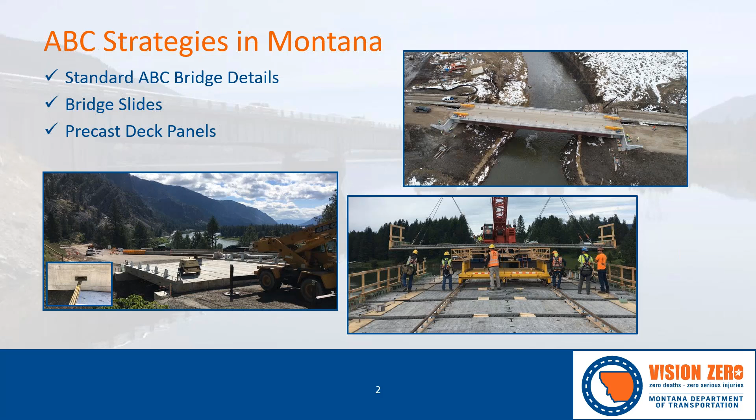When we think about ABC solutions, we might not always think about using it for bridge rehabilitation, but rehabilitation of bridges can have the same challenges as replacements, primarily related to construction duration and maintenance of traffic. Construction of the deck is often one of the longest duration activities on a schedule, so utilizing precast deck elements can reduce the overall project time significantly. We're going to discuss how we use precast deck elements on our featured bridge rehabilitation project today.

Montana is a geographically large state with a small population and a proportionally small budget for the maintenance, preservation, and capital improvements of nearly 5,000 bridges across the state. Our featured project is located in the mountainous northwest corner of Montana, where there are fairly high levels of precipitation and freezing temperatures for several months each year. The bridge spans the Clark Fork River at the head of the Noxon Reservoir near the small community of Trout Creek. The bridge carries Montana 200, which is an east-west state primary route. It's on the National Freight Network, and it's used for multi-state travel and shipping. It's also regionally important to the community for school bus routes and other public services.

So the essential purpose of the project was to rehabilitate the bridge. Rehabilitation was chosen to improve the overall bridge condition, particularly the deck, which was in poor condition, and to extend the serviceable life of the bridge. The deck had significant delamination throughout the entire surface and high chloride concentration, which had penetrated deep into the slab due to the frequent application of anti-icing chemicals. Because much of the structural section of the deck would need to be removed in order to eliminate the chlorides and prevent further corrosion, a deck replacement was chosen rather than a surface treatment like a partial depth mill and overlay. Complete replacement of the entire structure was not financially feasible for MDT, and we believe we could get several decades more functional life from the structure with a new deck and a rehabilitated superstructure.

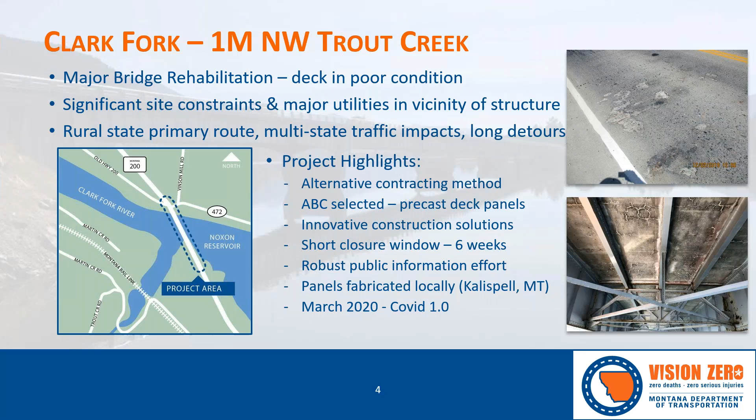The contractor received the notice to proceed and began mobilizing to the site early in 2020, when COVID started shutting things down in March. I believe the partnership developed with the alternative contracting and the use of ABC methods allowed us to press on with the project, mitigate risks and delays, and keep the project running safely.

I wanted to touch briefly on the alternative contracting method we used and what it meant to the project. MDT had just been granted approval by the state legislature to utilize this contracting method we call Construction Manager General Contractor, or CMGC, which allows us to bring a contractor, the construction manager, on board during the pre-construction phase.

And we thought this project presented an excellent opportunity to test the contracting method on a problem that could really benefit from early contractor involvement.

The project CMGC team consisted of MDT, the owner, HDR, the engineer, and Kiewit, the contractor, forming what we called the three-legged stool, each leg having an equal role that supported this project throughout pre-construction and construction phases. Kiewit was ultimately awarded the construction contract, thus becoming the general contractor.

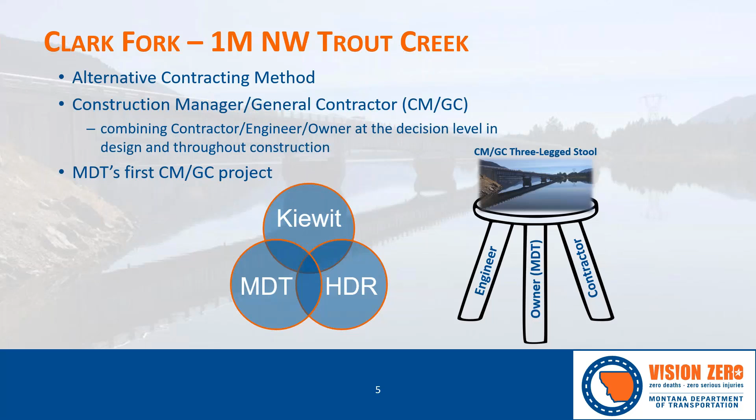So the pre-construction timeline for the project lasted just 9 months from project kickoff to contract award. Why so short? Well, funding for the project was available in fiscal year 2020, but it took some time to receive approval to use the new CMGC contracting method and get it through the RFP process for team selection.

And we wanted to let the contract in December so the contractor would have time to order and begin deck panel fabrication, which was a critical path construction element. And we wanted to get the bridge rehab work done before more deterioration occurred.

So that left us with a very narrow window of opportunity, but the team decided to take on that challenge and managed to meet this very tight timeline.

So the majority of construction occurred in the summer of 2020, with full closure beginning in June and lasting just 6 weeks, where most of the deck replacement work happened. That closure window was selected based on stakeholder and community input to avoid important events on the timeline. Traditional cast-in-place deck replacement would have taken at least twice that long, pushing the construction closure into September.

Other construction activities did take place before and after that closure window, with minimal impact to traffic.

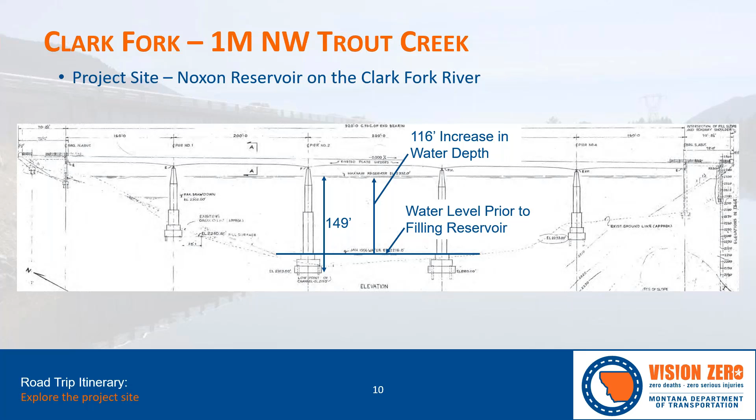Looking at the bridge in the as-built, we see that back when the original bridge builders were here, the reservoir was much lower. In fact, it was at this line. From the new water level to the bottom of that footing is 149 feet, and when they raised that reservoir, it raised 116 feet. This makes the bridge replacement and bridge detours much more costly in the current state of the reservoir.

Bringing us back to the bridge itself, the project team was originally planning to facilitate traffic on the bridge during construction. There are many cases where bridge decks can be replaced while simultaneously maintaining traffic, but the Trout Creek Bridge was very narrow and made up of a 2-girder riveted system that would only allow one lane at a time with traffic, making that construction unsafe. Based on a detailed structural analysis, the project team determined that the bridge may not adequately support highway traffic during deck replacement work.

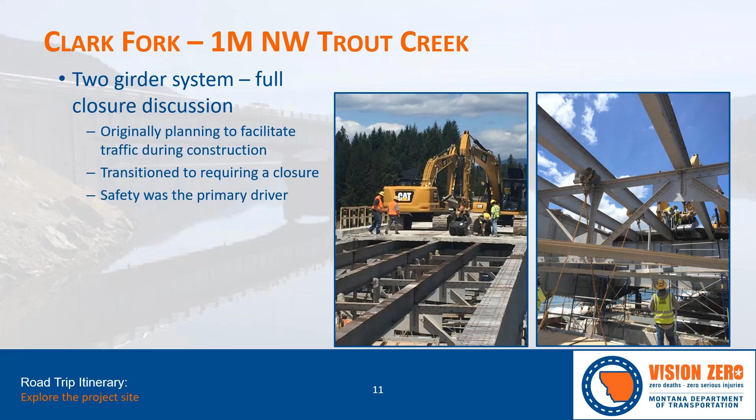Therefore, the team transitioned to requiring a full closure of the highway to complete the work. Again, safety was the primary driver of this decision, but also things like differential deflections of the bridge system due to live load traffic during construction were a concern for joint cures and the overall quality we wanted at the end of the project.

Stepping back a little bit, I wanted to talk about some of the main features at the project site. I wanted to take advantage of some fantastic footage we have to provide a better overview of the site and some of the work we'll be discussing today. This is in our itinerary, that detour down memory lane, but it's also kind of a project summary, so keep that in mind.

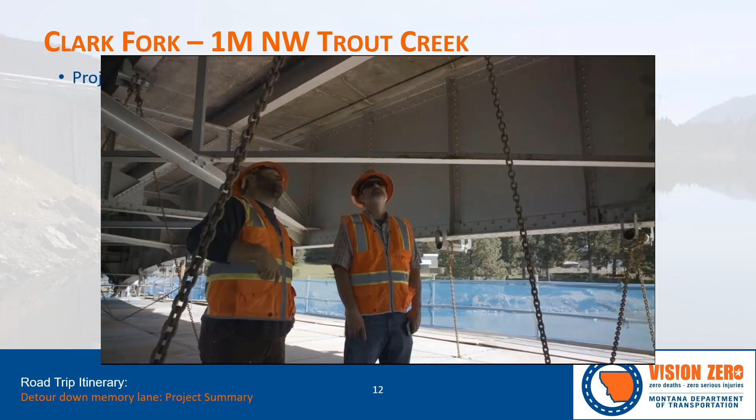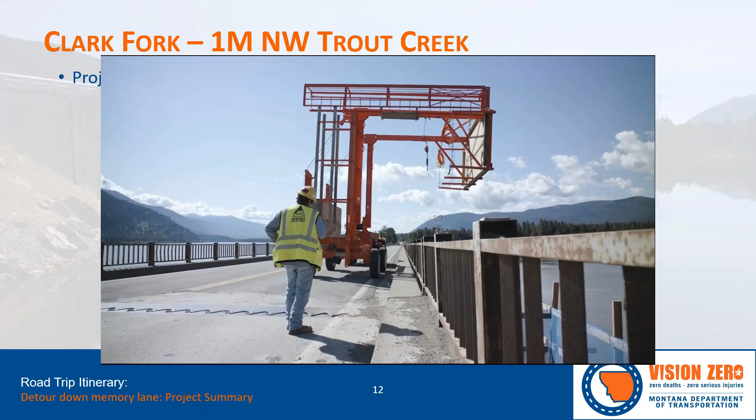We start out with a view of the Clark Fork River Bridge near Trout Creek, as we've seen before. Even though the bridge was around 60 years old, it had been well maintained and proved worthy of rehabilitation. Due to the site constraints previously discussed, including the extreme depth of the intersecting waterway, construction of a temporary bridge, either traditional or floating, was determined to be impractical and very costly. While the project cost was approximately $10.5 million, it was estimated that a replacement structure would cost nearly 2 to 3 times that amount.

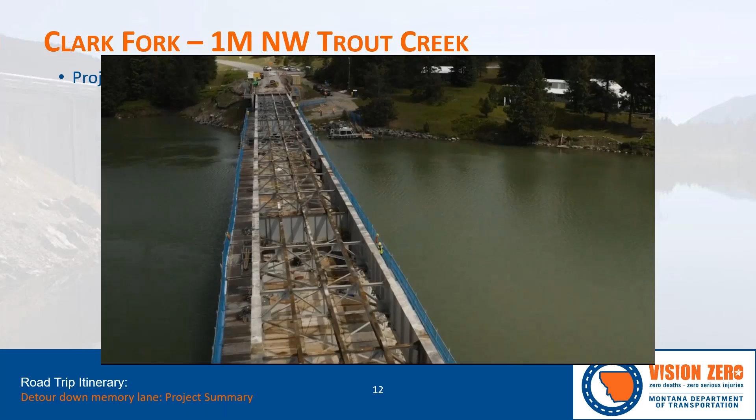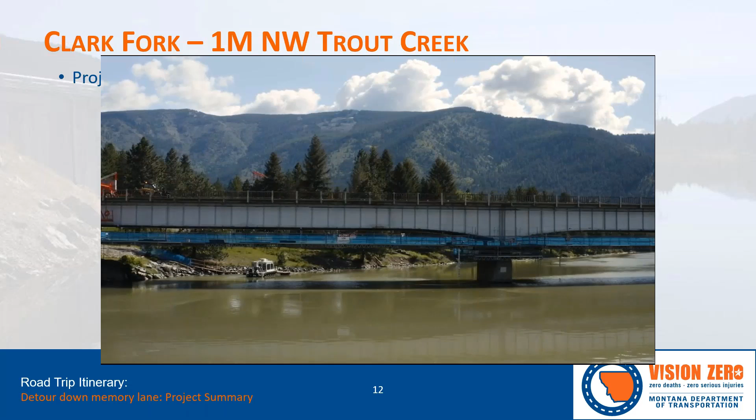After much review of the structure and considerable design work, a plan was formulated to temporarily close the structure, remove the deck, and replace it with full-width deck panels. A temporary scaffolding was constructed beneath the bridge to provide safe access for the rehabilitation work, as well as contain a lot of the construction debris. Much of the work during the closure would be to remove and replace the deck panels.

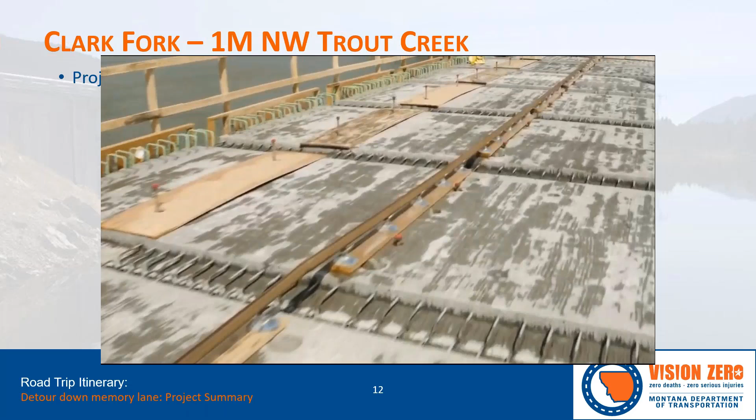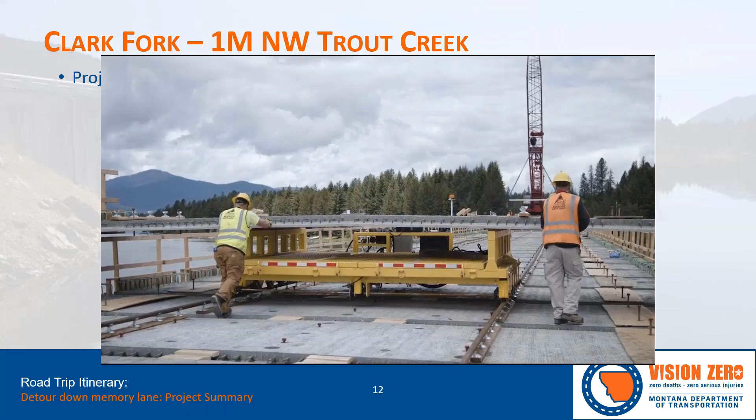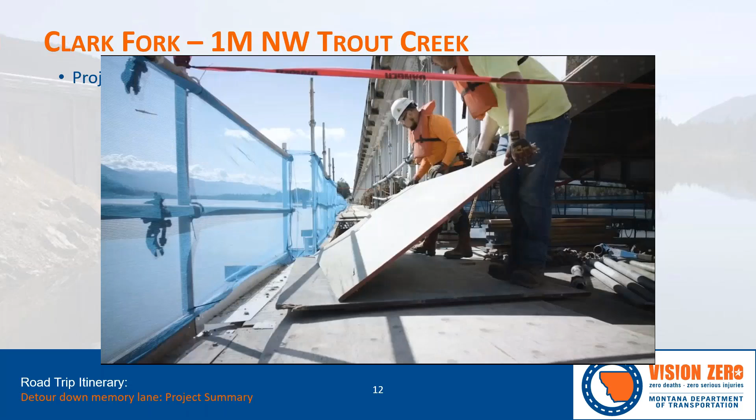This was a delicate balancing act between large ABC components, construction equipment, and the structural limitations of the bridge itself. The CMGC team provided the innovation, attention to detail, technical expertise, and construction experience, compiling all this into a unique and creative solution, all within a very narrow construction window.

That brings me to wanting to talk a little more about our pre-construction and that CMGC process. So I'm going to reuse this timeline.

While the team originally intended to keep the facility open to traffic, it soon became apparent that a closure was the safest and most cost-effective way to move the project forward. Therefore, in the condensed project design phase, several stakeholder meetings were held to provide a construction solution that made sense for the community of Trout Creek and the region. The decision was made to condense the majority of the critical construction work into that 6-week full closure that we mentioned.

When we look at a timeline of the construction activities, the 6-week closure really makes sense. Note that the 6-week closure is carefully bracketed in June and the first half of July, and this wasn't just for the sunny weather we've seen in the pictures. Working closely with the community, the design team found a window that really minimized that public impact.

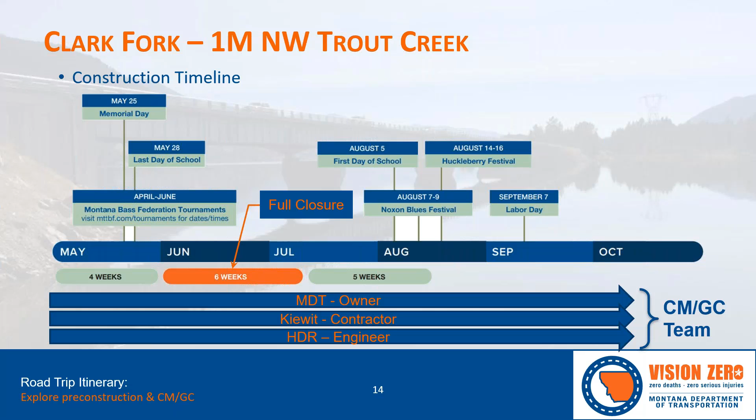It's worth noting that the design team also carried 2 closure proposals forward to the public, with the second option consisting of 12 weeks of intermittent closures. The additional cost of this option was estimated to be $2.5 million, and it also overlapped with several important events on this timeline, like school, for example, and running those school buses. The 6-week closure, as shown, was obviously the choice selected.

And we have to do a little more navigation through that closure. I don't think we can mention closing down MT200 without that. The only local detour for MT200 is what we call Blue Slide Road, represented by this black line, 472. Blue Slide Road, as its name might suggest, is a lengthy, narrow, and windy local detour route.

It's also load restricted. So to help mitigate the impacts of the full bridge closure, the bridge team helped coordinate access plans for emergency services. We collaborated with the trucking industry to notify carriers of applicable restrictions. They provided much needed safety improvements to Blue Slide Road that was used as just a local detour only during construction. And we even facilitated a temporary dump site to make garbage disposal for residents more convenient, and installed hundreds of temporary mailboxes to reduce the travel distance for residents to access their mail.

As shown on the map on the right, this effort included a regional alternate route plan with single-use signs placed in Montana, Washington, Idaho. For example, we see Spokane, Washington. There's one in Coeur d'Alene and Sandpoint, Idaho. Basically, any route that led to MT200 was marked. This was, of course, in addition to radio announcements and all forms of social media, mapping, etc. We didn't take the 6-week closure of MT200 lightly at all.

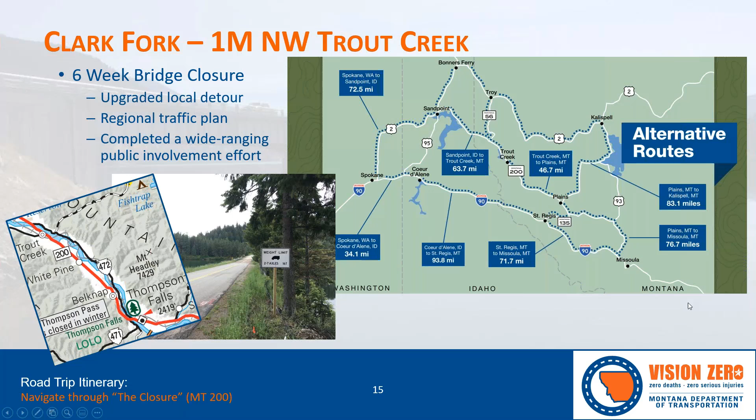And now, a little backseat driving. Let's talk about one of the big ABC components, and that's these deck panels. They represent the majority of the work completed during the 6-week closure window. And I think it still amazes me thinking back that in this remote part of our state, we're able to close a 1,000-foot-long bridge for only 6 weeks, completely remove the deck and replace it.

I think these deck panels are a great example of accelerated bridge construction and really the key to bringing success to this project. They are the result of an awesome design effort. It really combined the fabrication skill and the construction know-how, and we're going to be talking a lot about that. We're going to talk about formless joint panels. We required a mock-up. There's a cart and buggy system for panel transport, and even the crane movement itself I considered pretty innovational. So let's get some bookkeeping stuff done though.

I wanted to mention for new bridge items, the design was prepared with the 8th edition AASHTO LRFD bridge design specifications and for HL93 loading. Also, you'll see what looks like some common black bars in the deck panel pictures that are coming, but we actually utilized MMFX corrosion resistant steel in the deck panels as we wanted that additional level of corrosion resistance for this design. And a specialized but conventional concrete mix was used in the joints.

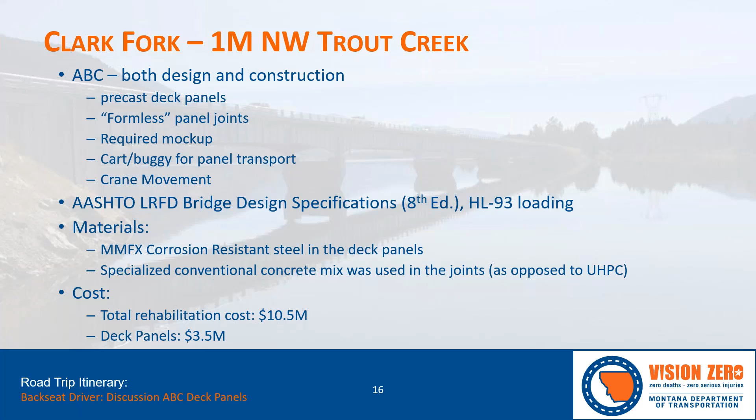Speaking of cost, it's worth mentioning the total rehabilitation cost was $10.5 million. And furthermore, the deck panels made up about $3.5 million of that cost.

Jumping right into the design, I have shown here a typical transverse section of the full width panel. The widened roadway width is 32 feet from that 28. And with the curbs, these panels are actually 34 feet, 4 inches wide. The panel thickness is only 6.5 inches. Note that the curbs were chosen to be cast in place later, so they're shown here but they're actually dotted, and only the steel for that curb is there. That was to save weight and also to eliminate those longitudinal joints or those transverse joints in the curb. These full width panels still weighed around 25,000 pounds.

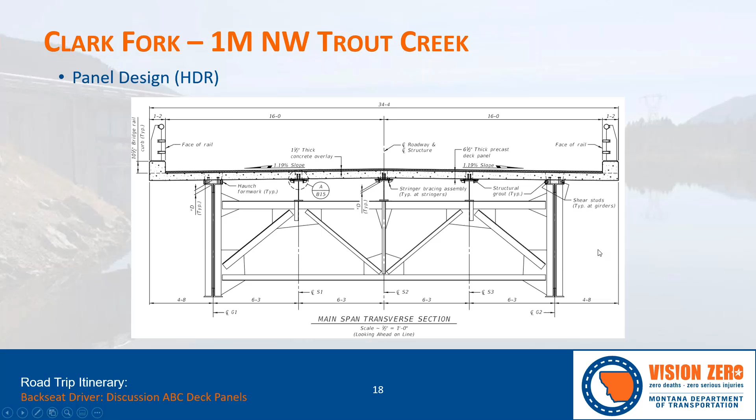We're now looking at another transverse section, but this time it includes the superstructure. There's a 1.5 inch overlay, so that'll make a total 8-inch deck thickness. There are shear studs on the main girders, and those are intended to make it fully composite between the deck panels and those riveted main girders. There's also shear studs on the stringers shown in this detail, but it's important to note those were only to provide lateral bracing for those stringers, not for composite action. One note, we did a lot to reduce the weight, like the curb and rail will be added later, but the 1.5 inch overlay also was meant to provide a better riding surface continuity between all those panels.

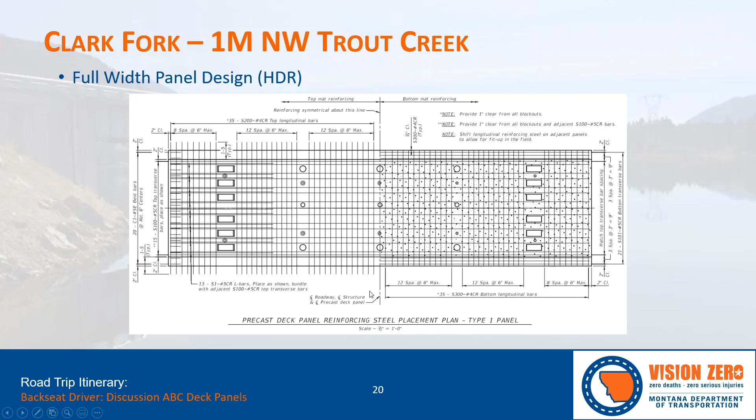So a lot of details in here, and I wanted to go one step further, not to show all the steel in each little piece, but to show more the congestion. There's a lot going on in these panels. I thought the design team did an excellent job fitting in all the required steel for structural purposes, detailing it out such that it could be built, fitting around all these leveling devices and the necessary shear stud pockets and many other things. There's scuppers in some of the other panels that they did just a great job working all the details out there.

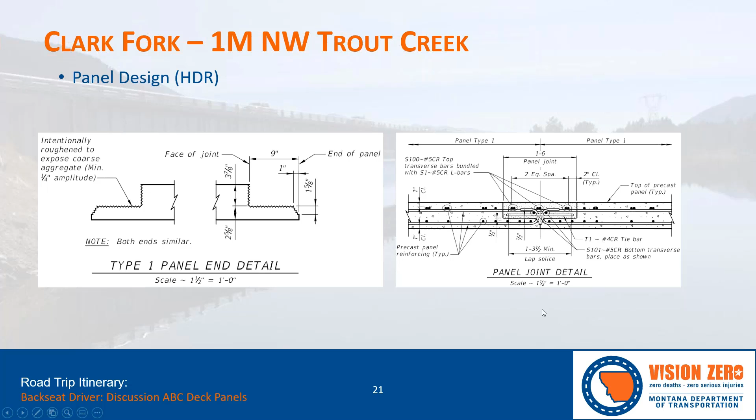So we're going to be following this formless joint into fabrication, and then of course out onto the bridge during construction.

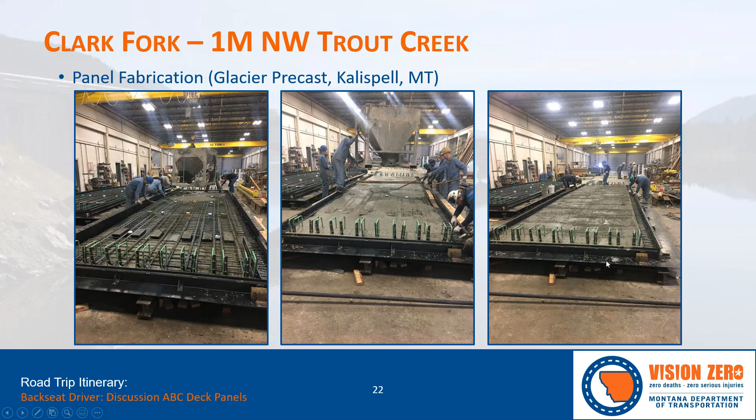In the middle picture, you'll see that the placement of the concrete's further along. They're about halfway. You can see a screed board moving across. And then in the final picture, you'll see that they just got done roughening that surface and pulling the side forms off. I want to mention at this point that these are our mock-up panels.

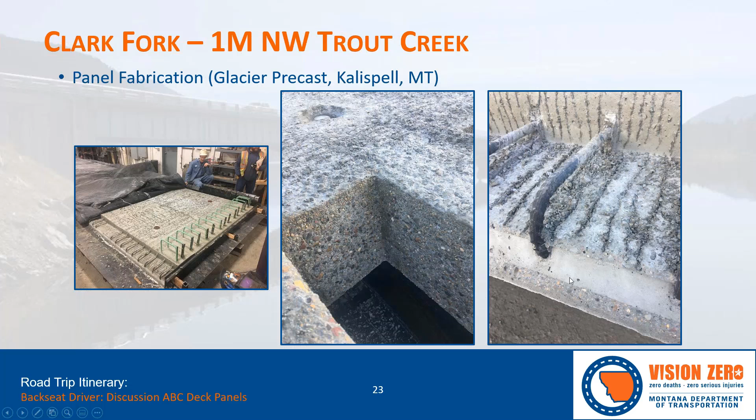And then, of course, one of the most important things we could have done at the start was to make sure that we could fit all that joint steel that was really going to shore up the joint for the design, and make sure it was actually working out before we built the other 96 of these panels. There are smaller things too that we learned on the mock-up, like you can see the edge on the picture on the right that I'm pointing at with my mouse.

You can see that there's some slight cracking and it's sloughed off a little bit. Well, Glacier Precast immediately recognized that they pulled that form off a little bit, and then of course adjusted their processes so that didn't happen again, and we had nice clean edges. So we really did learn a lot.

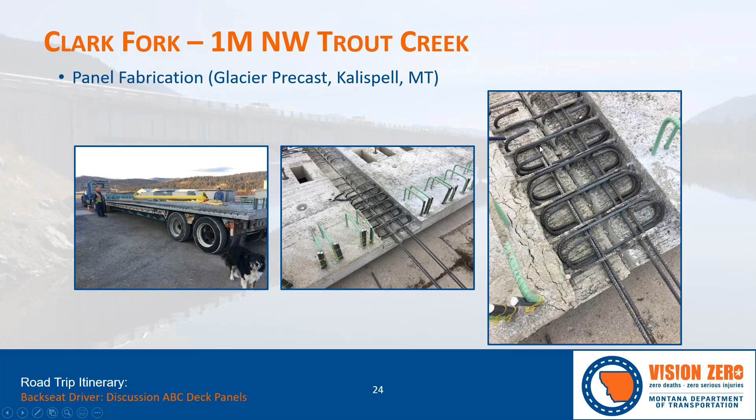In this picture also, this is as far as we can push those transverse bars. So we did recognize a clearance issue that sends us right back into the shop. This is an important lesson learned, and Glacier Precast did a great job. They jumped right in there and did some modifications to their connecting formwork.

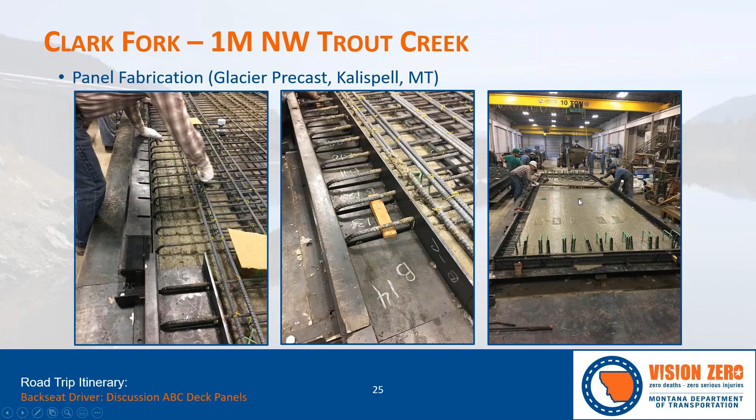I put this blurry picture in to show the connectivity between the design team, the fabricator, the contractor, and MDT. This team was moving fast to get these panels made. Prior to closing the bridge, we only had a few months, and in that time Glacier Precast needed to make 98 panels and have them shipped to the project site.

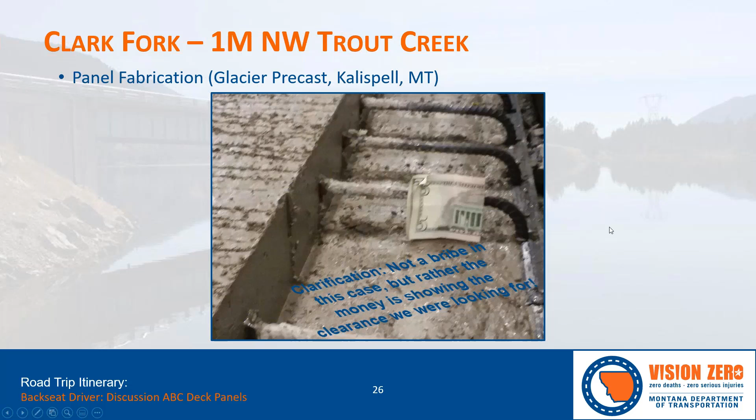It isn't a bribe, but rather a quick picture that satisfied all the concerns that the new changes created or corrected, the necessary clearance that we needed in those formless joints. So that was kind of our money shot, and it just meant a lot to us.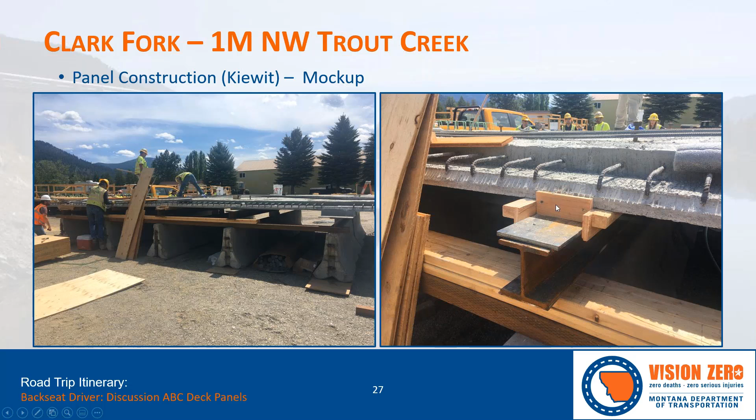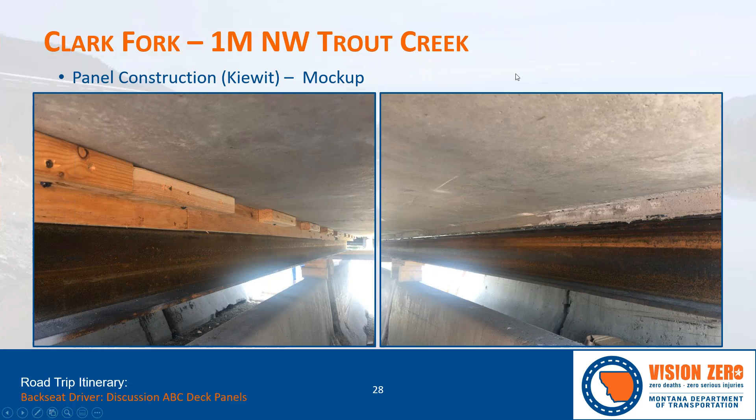We also want to look underneath and make sure that concrete's not running out, and that the method of attachment to the panels was what we wanted. We wanted to make sure that specialized concrete mix was consolidated in that region. So we really pushed these a long ways, right out to the job site, and we were really happy with doing that.

At the same time that we're playing around with our mock-up panels, Kiewit's already out on the bridge, saw cutting and starting to remove deck panels. Our main strategy was that we just left that saw just about at that bottom mat of reinforcing. We wanted to be really careful we didn't hit the stringer flanges, and I'll talk about mitigating risk later in the CMGC process, but that was something we really wanted to be aware of.

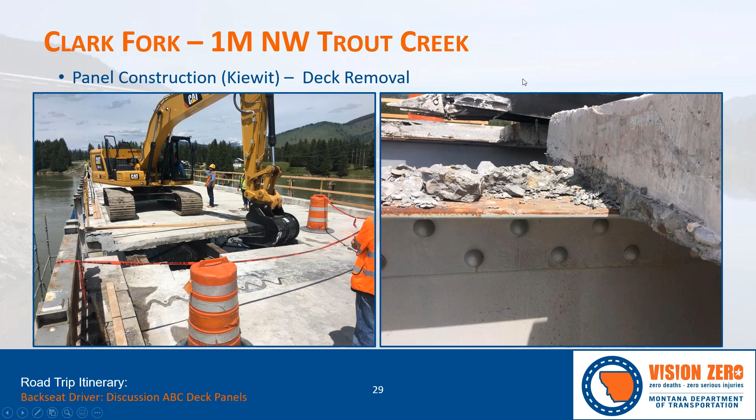So the contractor just kind of snapped that last half off, and that proved to be a good strategy in this 920 feet of deck removal, which actually went fairly quickly, in my opinion.

After the deck is completely removed, our next step is to place the 96 panels onto the structure. In this video, the first crane was picking a deck panel from a delivery cart, and the cart transferred that panel out to the second crane, which you'll see precisely placing those panels in sequence.

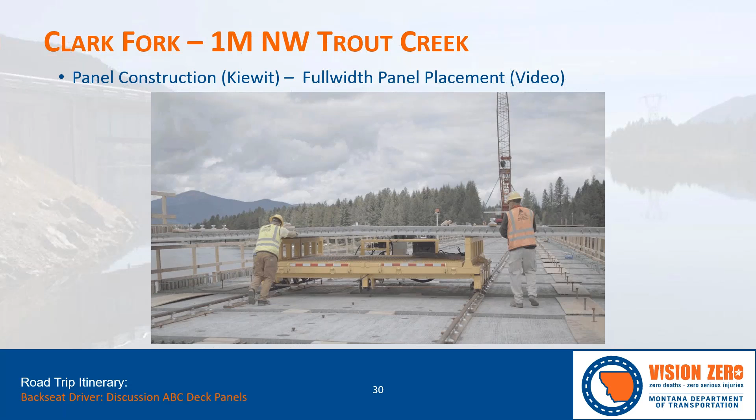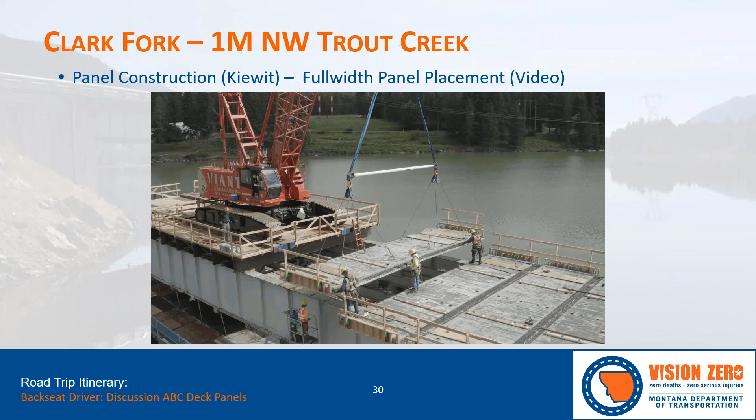As the sequence starts over, I want to point out that Kiewit did a great job: you'll see the formwork for the curbs already built onto those panels, and they packaged up a bunch of the steel that would be replaced in the joints, along with the rail that would be extended on as they placed the next joint. So they packaged up a lot of their work safely off site and brought it out here in a nice clean package on those deck panels. It really went well and was very efficient.

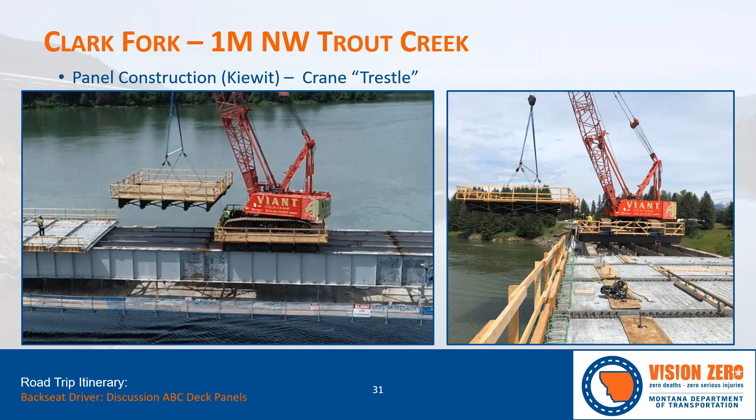I also wanted to talk about that crane that's awkwardly out in the middle of the unbuttoned structure without its deck. We'll see that Kiewit came up with a strategy to make two crane trestles. In the picture on the left, you'll see that they can lift up. Once their deck panels progress far enough, they'll actually lift that trestle up, and on the right picture you'll see where they've swung that around, then place it behind their crane, and they can walk that crane backwards using that second mat. So they leapfrog down the bridge in fashion, and it was a great strategy along with their cart and buggy to really reduce the loads on that structure while we didn't have that deck in place.

So we're getting near to being done with our backseat driving, but I did want to bring us right back to that joint. It was a huge part of this - I'll say 96, 97 of these joints. Here's a completed one with all that steel in there. You'll see the design intent, and you can also see the leveling devices - these two would be on the stringers, and then there's one on the main girder. You'll see the grout holes. So a lot of that detail coming to life out on that bridge, and really successful.

And of course, I bring back tying that together, the importance of the mock-up and just making sure that when we peeled this deck off and put all these deck panels back on, that we could get them done and in place and finish in that 6-week closure - our promise to the community.

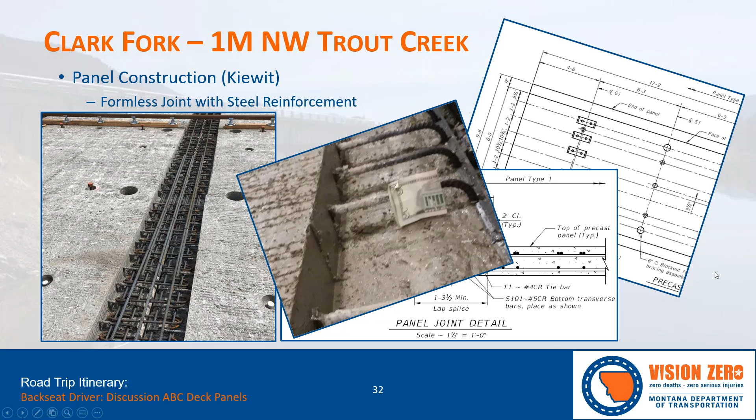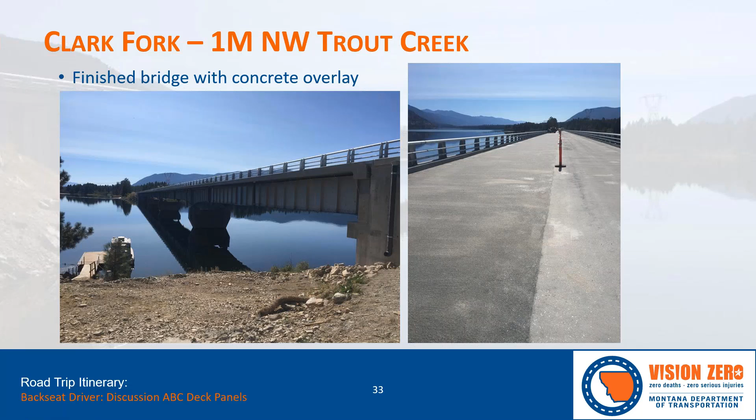And so we can't avoid talking about all the good things and successes there without talking about a few of the challenges that we had. As Stephanie mentioned, we had a short pre-construction time frame - about 8 months between kickoff and award, and we had a lot to figure out. One example with that is the road closure decision. It was really a pivotal moment in the pre-construction process to really shift our focus from that one lane at a time, maintaining traffic, to actually needing to close this down.

Not only are there design changes, but there's a lot of - we had a huge shift into public input and involvement, and as I mentioned earlier, there's a regional coordination effort. The reason why we took on those challenges was safety, both for the public and the contractor. But there are other benefits to that. One of them, as a bridge engineer, that I appreciated was it eliminated that longitudinal joint between adjacent deck panels, because we had that full width panel now that wouldn't have been possible.

The formless deck panel joint - we can all see that it was congested. It was a challenge. I think this team met that challenge head on, as I've mentioned numerous times with those mock-ups, and we really did our homework to make sure that when we got out to the job site with those 96 other panels, that steel would fit in. So I think challenge accepted on that one.

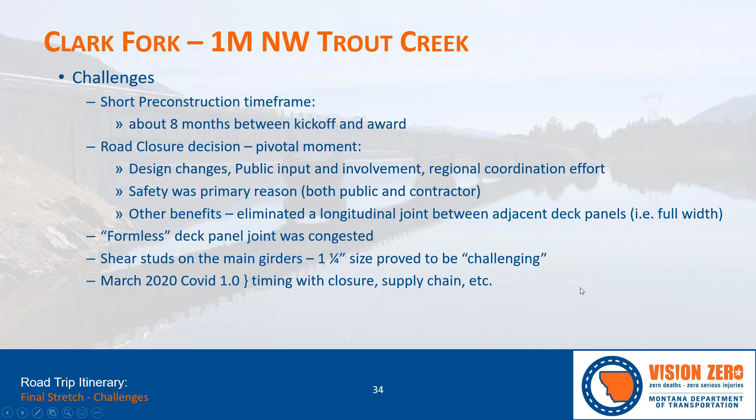And then Stephanie did mention the COVID in March 2020, which we're all familiar with. But when we're ordering new bearings for this bridge, we have supply chains - things coming in right during this time from January into May. So we're writing letters of essential work and that type of thing. So as Stephanie said, the team did great meeting those challenges.

Lessons learned - we obviously used the first one, I just mentioned the 1.25 inch shear studs. I think I can simply say they may have actually been required for this project. We had some extreme requirements to fit those in with all the steel. But if there are any other options, it's worth trying to figure that out, to get those smaller shear studs in.

CMGC proved to be an excellent delivery method for this project. And I think in bridge, it's a lesson learned that we think it'd be great for a lot of ABC projects. We're new to CMGC, but if you're all more familiar with that, it probably makes a lot of sense why we say that.

But it really all boils down to the risk and how to mitigate that. There were a lot of unknowns for this project going into it, and having that contractor and such a good design engineer all meeting with us and figuring these problems out really allowed us to mitigate that risk.

One clear example: nobody knew what the top of those stringers were going to look like when we peeled that deck off. How much corrosion was there? How much could we accept? We were able to talk about all those things and figure out ways to first mitigate that, and second come up with contingency plans—well, what if we find something we weren't expecting? We worked all that out ahead of time.

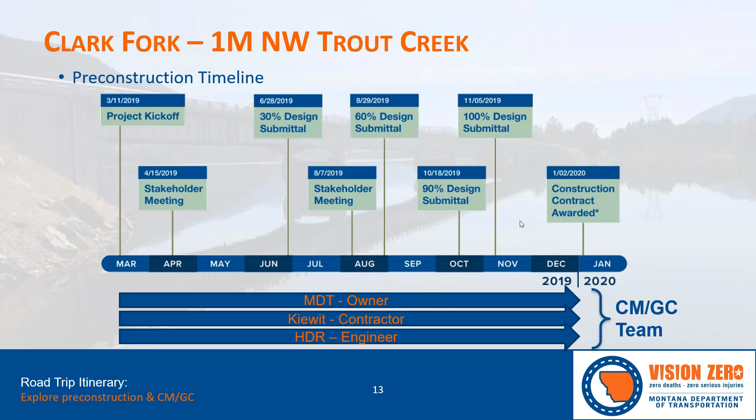Was there any cross slope built into the panels? You had a picture of the panel earlier, I'll bring that up. So it was 1.19%, and Dustin can add to this.

Sure, yeah. We originally looked at just trying to build that into the overlay, but it made sense to build it into the panel. We also looked at trying to make the panel flat across the bottom, but the problem is the panel started getting pretty thick and heavy and hard to manipulate, ship, and handle. Plus it increased the dead load on the structure significantly. So for this rehab project, we were kind of forced to build that into the precast section.

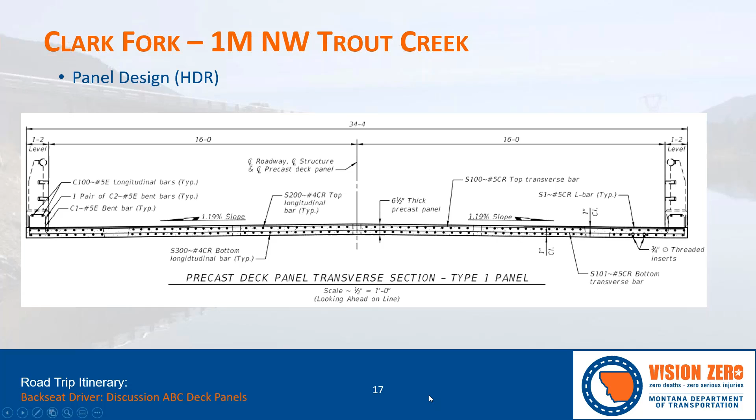There was a question about the leveling screws that came in during your presentation. Were the leveling screws used in any way to make sure the tributary dead load to the stringers and the girders were controlled? And if so, how was that done?

That's a good question. I think the primary purpose of the leveling devices was mainly so we could distribute the weight out among all those members, but also their primary purpose was to make sure all the heights were worked out, as different deflections occurred and that structure rebounded maybe differently. So we wanted to handle any differential deflections we weren't expecting with those leveling devices. But besides the weight of the panel itself, we were really relying on that haunch concrete pour to shore up the remainder of that.

Dustin and Ryan, do you have any other insight on that question? Yeah, they had to kind of limit the amount of torque applied to those leveling screws, so that they couldn't get a high amount of torque on one leveling bolt versus another. Specifications controlled how much difference there could be. It was intended to keep the weight distributed evenly between those leveling nuts.

There's a couple of cost-related questions that came in. Were there any claims from the contractor for the project? I'm going to say from my Bridge Ivory Tower, no, but of course Ryan's the professional there. No, there were no claims on the project.

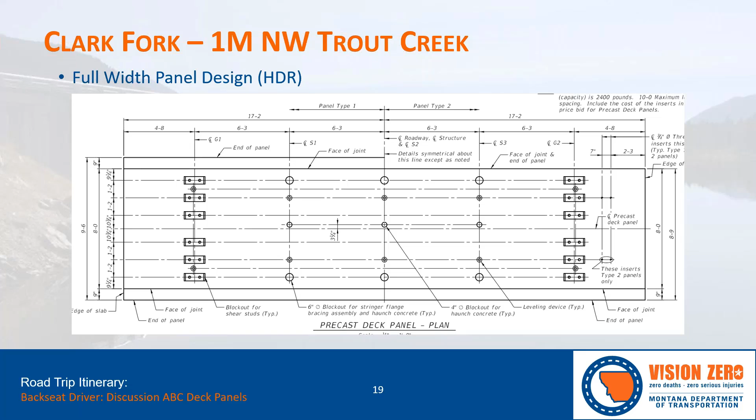Would you recommend a number of smaller studs equivalent to larger studs? Yeah, if you can fit those shear stud pockets, if you're able to fit the larger pockets you'd need for more of those studs, because there's clearance requirements around each stud. If you go smaller studs with more of them, we found that pocket size grew. I should hand it over to Dustin because they spent a lot of time working on that.

Yeah, it was kind of a tricky scenario, trying to fit all those smaller studs into a stud pocket and then move everything else around that needed to be in a panel. At the time, those larger studs seemed like the right option, but I think we'd probably rethink that again if we had to do it again.

Were barrier ratings improved from TL1 to TL6? I think this was a TL4, Dustin. Yeah, that was improved to TL4. From the original barrier, I don't know that we had... this was pre-1958 design. So yeah, significant improvement from the original barrier design.